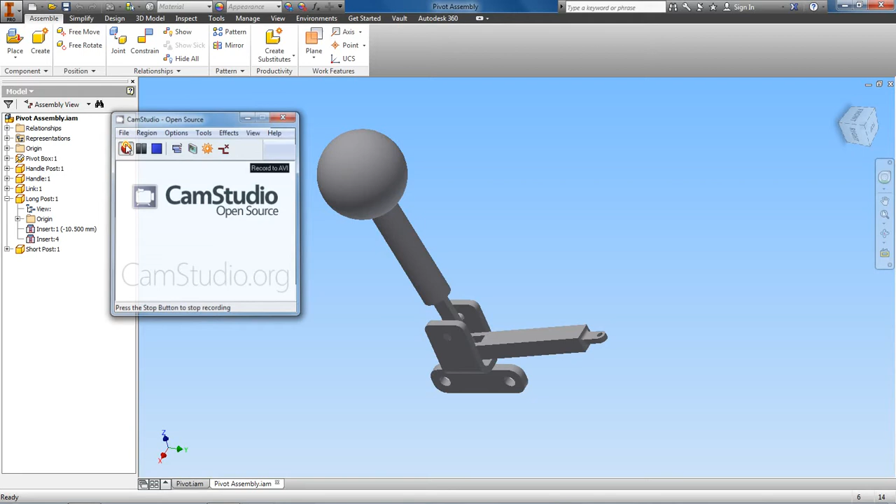Now that we have a completed assembly file, we can go ahead and open this up in a presentation file. So we'll go to New, and we'll go down to Presentation. Okay, so now we have a new presentation file, and we want to import that assembly file into it.

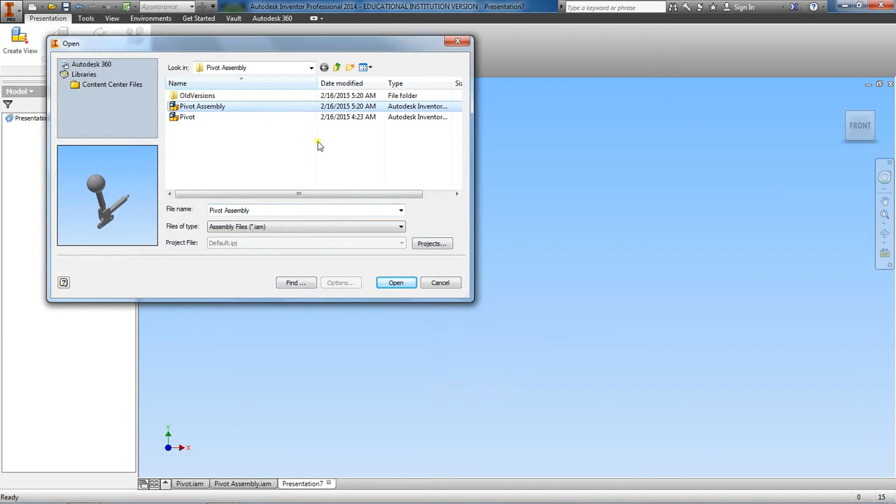So we'll go to Create View, and just for teaching purposes, even though by default, because I have this pivot assembly already open, it's already set here. But remember, you can click on that folder icon and look for whatever assembly you want to import. In this case, it's our pivot assembly. Hit Open, make sure this is set to automatic, and click OK. So now we've imported this assembly and we want to separate the components.

So the feature for that is to tweak the components. Go up here and select Tweak Components. When we're removing these components, especially when you go to animate them, you want to show how you would physically connect these parts. So if I just snatch this handle up, remember there's a pin in here, a short post, and then you have this link and all that. It really wouldn't make any sense physically. So let's do it as if we had this real part in our hand and we wanted to separate it.

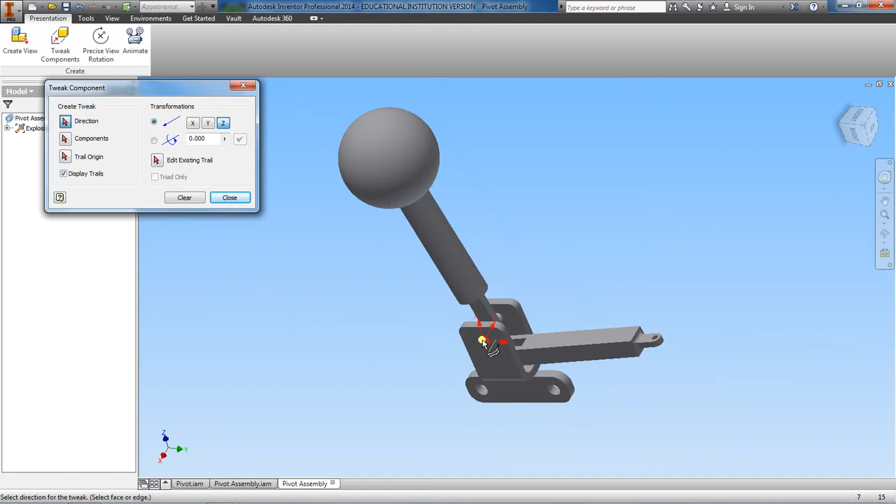The first thing I would have to remove is this pin right here. So I left click on it, I've selected it, and I can drag in the direction that I want to. Let me go back and select. Sometimes it's a little tricky. Let's go back to components. Let's just hit clear and try it again. Hold down left click, and then drag in the direction that we want. There we go. Okay, so this makes more sense, taking this pin out here, and we'll hit clear.

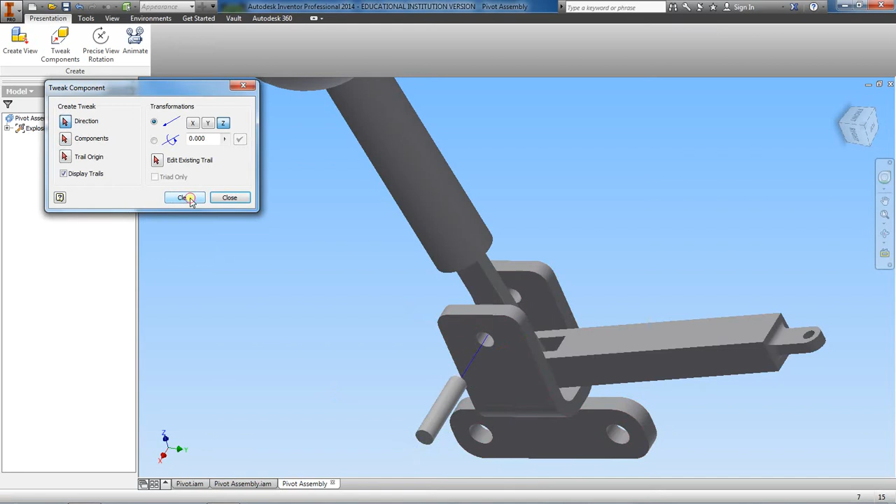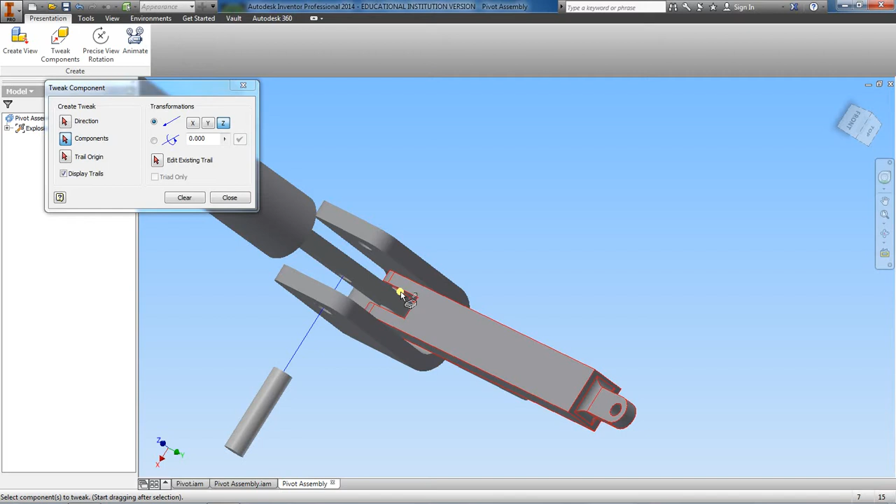And the next thing, remember that there's a pin. Let's hit clear here. Remember that we have a pin inside of here. Okay, there's a pin, a short post, and then you have this link, and then you have this handle post, and then you have the handle all attached.

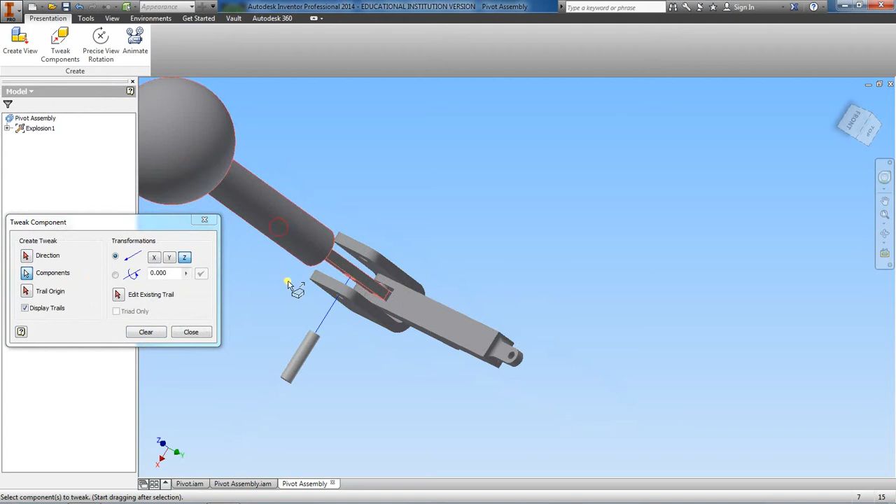So let's see if we can move all of those at one time. With component set, we'll select here and go back and select components again. We'll select this one. Make sure that it's highlighting all of these. And then I go back and select components, and I want to see if it will select. Make sure I am selecting this pin here, or the short post - keep calling it a pin. Okay, so now the direction I want to move it in.

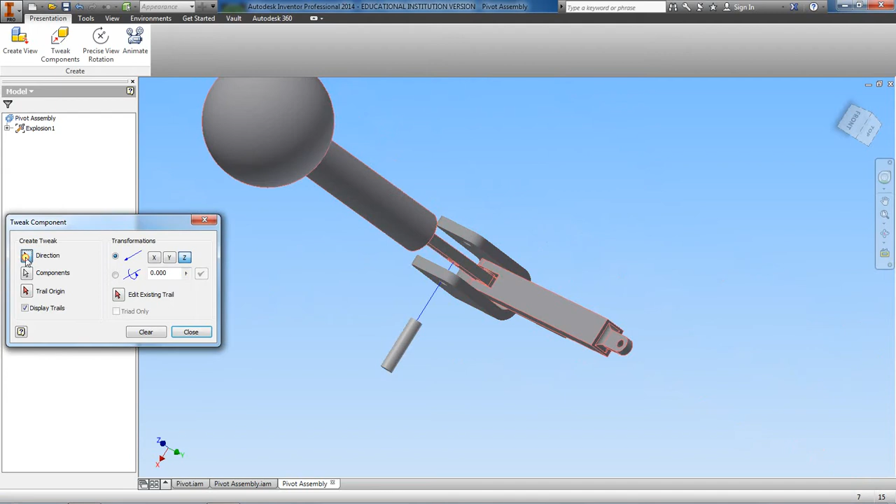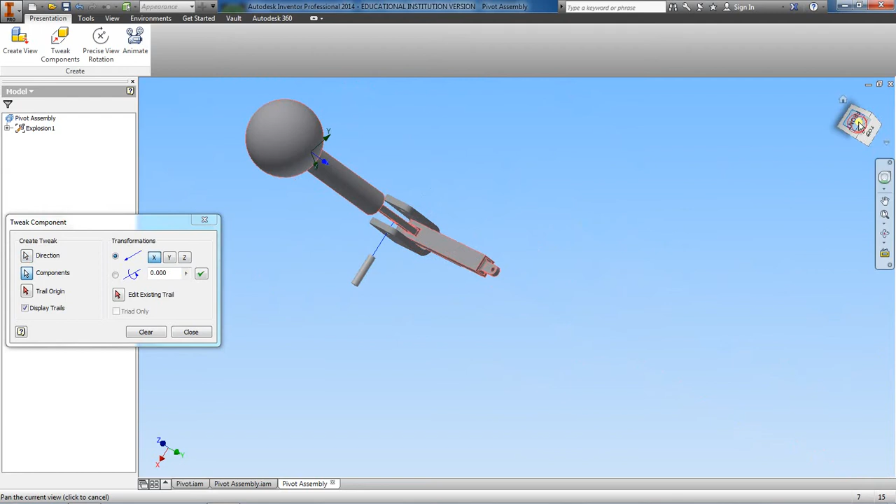Let's say I'll move it up. So here's the direction. Let's see, it's not quite right. Or I can go this way. Nope, see, nope. Let's do this, let's get a better angle. All right, so there we go. Going up, and I'll move it up a little bit more.

Okay, so we'll clear. This is probably the difficult part of presentations: grabbing how you grab onto the parts, and when you move it, sometimes it is a little stubborn and doesn't want to move right away. So it does take a little trial and error.

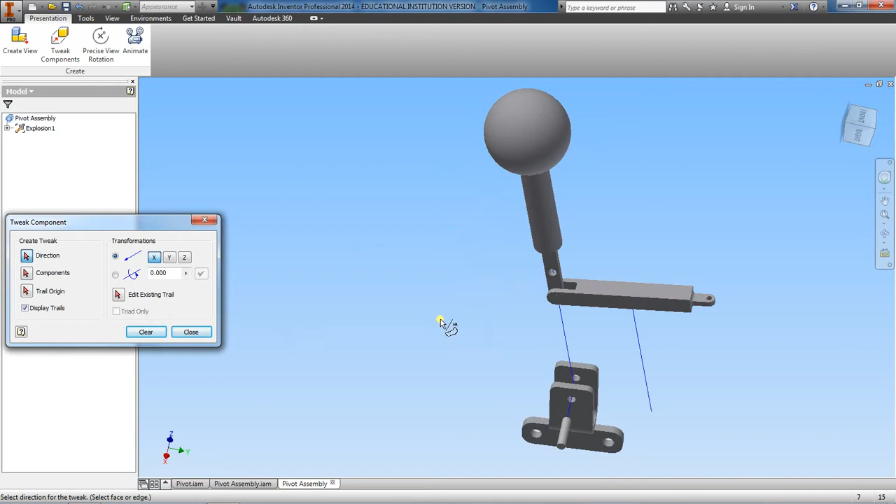So here, and you can't really see this short pin because again, I didn't change the material, but it's there, and you can see here. So I'm going to select this, and I'm going to move this out. Remember, I'm holding down the left button. Now that I have the post out, let me go back here.

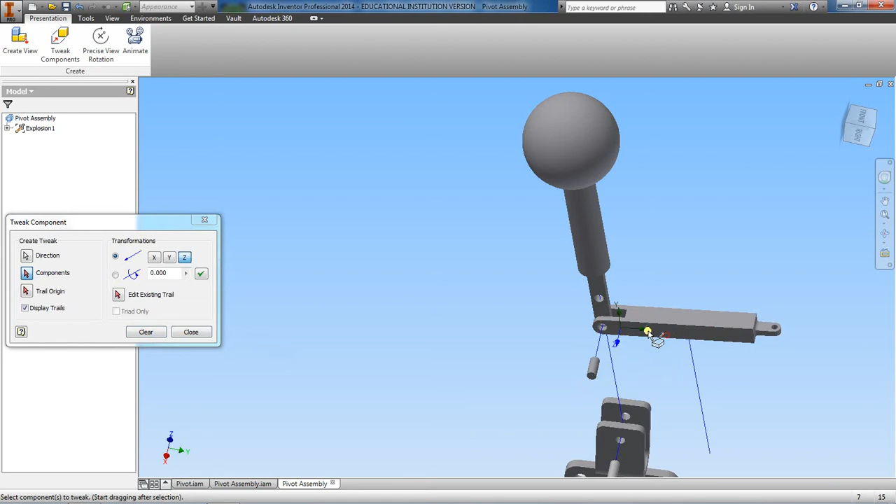Clear. I can separate this part here. So I'm going to move in this direction. See if I can get this. There we go. And come over here and hit clear.

And then I'm going to take the handle, move it up this way. All right, clear. And then close. So let's see what this looks like when we animate this.

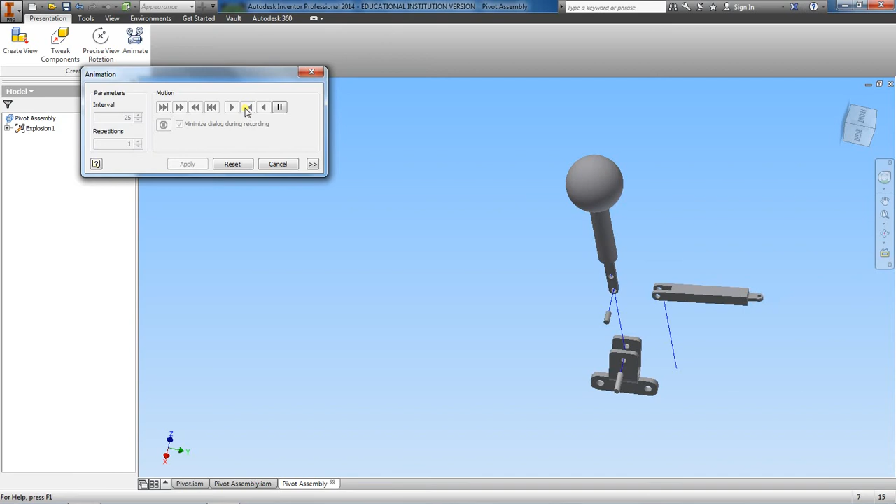Handle comes down, link comes back, pin goes in, goes down, back in. Then the other. Okay, pin out.

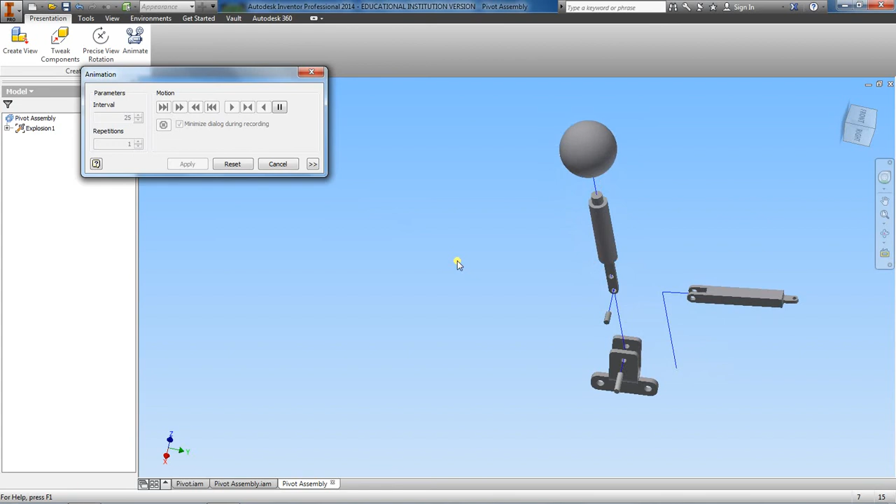So physically, if you had these physical parts, this is how you could separate them, right? And so now, when I go to open this up in a drawing file, I might have them separated too far and I can adjust it. But for now, let's go ahead and save this. And we can call this pivot assembly, because it's a presentation file, which is a different file type.

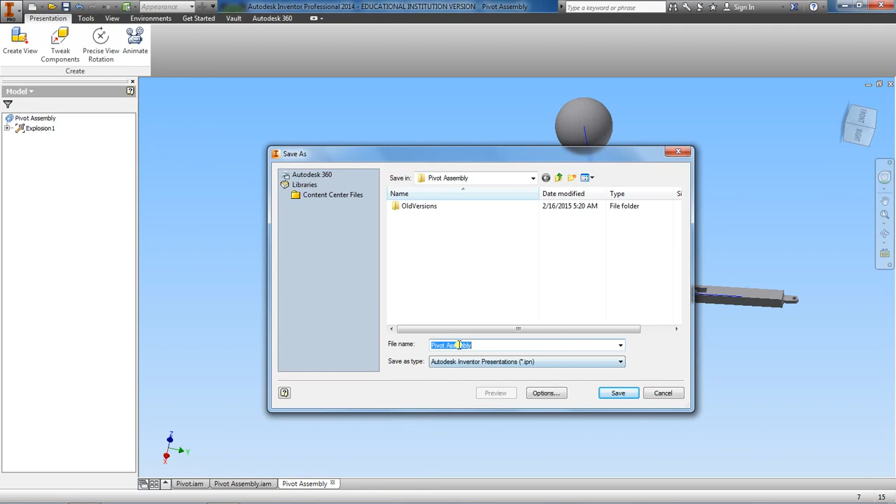And save. This box always comes up. Click OK. And then in the next video, we'll see if we can kind of clean up these trails or shorten them a little bit.